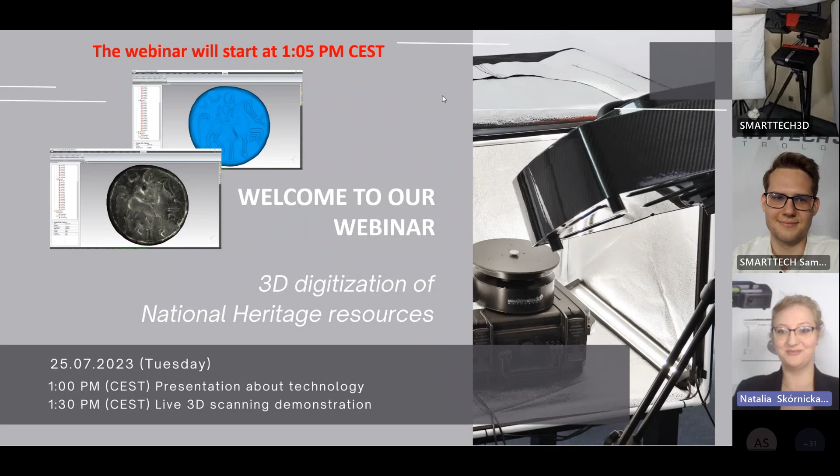To hear a little bit more about the 3D digitalization of national heritage resources. For everyone who doesn't know me yet, I'm Natalia Skórnicka. I'm an archaeologist and I work here at SMARTTECH as a 3D scanning specialist for science and research applications, actually. So very much in the subject. And here with me is our senior engineer, Paweł Aksamit. He will be helping me and presenting you the abilities of structured light technology today.

So let's jump straight into the presentation. I would like to start with a few words about the company that we are here today, but I will not be focusing only on the technology that is invented and developed in this company. I would like to give you a little bit more knowledge and information about archaeology and about different 3D scanning technologies that are possible to be implemented in the field.

This webinar has two main reasons why we decided to give such a short lecture. First of all, as SMARTTECH itself grows from the universities, it's very, very important for us to educate people and to give a heads-up on what's new in technology. We also have had a lot of questions from archaeologists for a few years, and the lead cause of that is that the European Union gave a recommendation in 2019 for museums in Europe to digitize at least 50% of the collection that they have. And since then, we observe growing interest from the archaeological field.

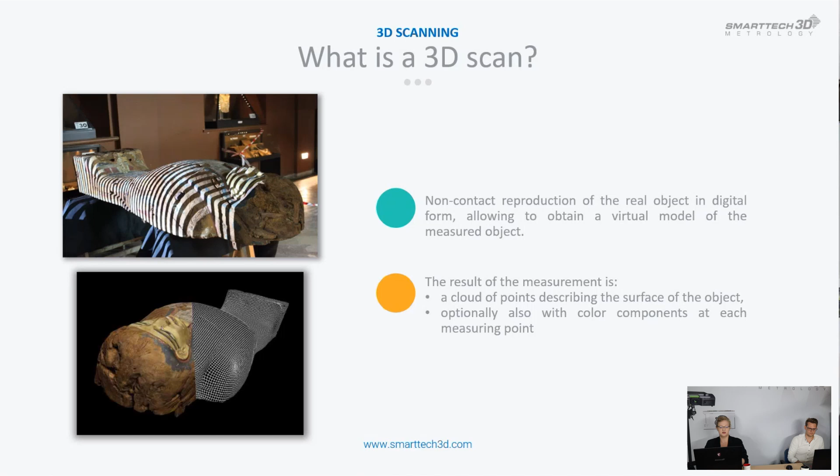But to start, what exactly is 3D scanning, for all of those who are from the field and are interested and just starting your adventure with 3D scanning? A 3D scan is basically making an image of a real object and taking it to its digital form, so you can use it on your computer, on your laptop, on your phones. We have different methods of 3D scanning, which I will be describing in a moment. But when we are talking about 3D scanning, we will be using a few terms: visualization, digitalization, and archiving. And I think it's very important to know the difference between them.

Starting from visualization, it's basically the most basic form of the 3D image that we can see on the screen. The density of points is a little bit lower, so the data file is lighter, and easier to implement in your presentation or on your website. You have a good image of what the object is, but you don't have any metrology data, so you cannot measure it. Those data are great to use on your website, but you cannot base any research on them.

The step up from visualization is digitalization. In addition to a very good representation of the surface of the object, we are adding metrical data. So we will know the size of an object, the distance between points that we want to measure. Those data can be used for research, are a very good representation of the object, and can be a part of professional archaeological documentation. And up from there, we have archival data. Those are data that have to be unprocessed.

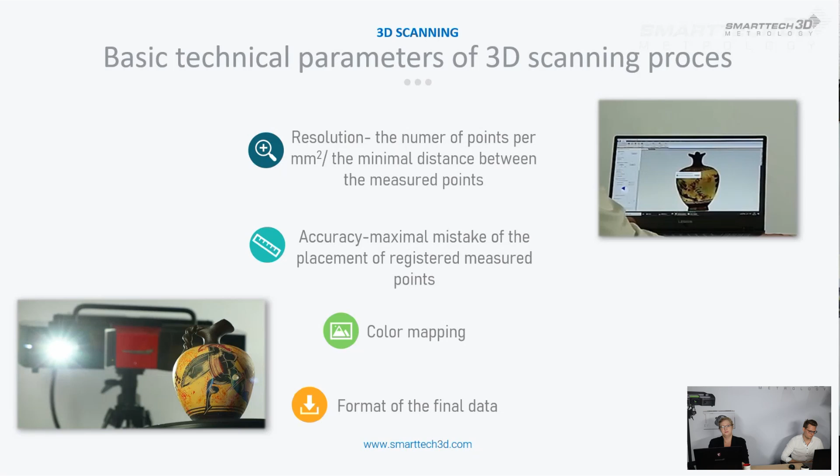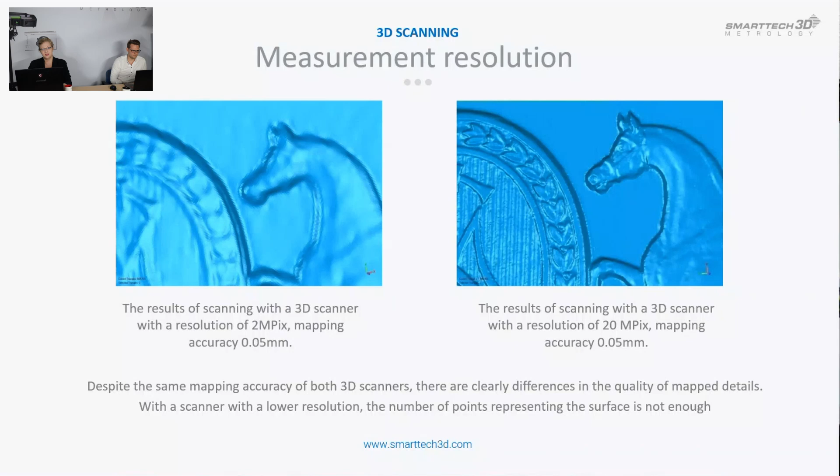And you can see that even if the accuracy is exactly the same, the visibility of details on the higher resolution picture is obviously much, much better. So those two parameters are very important to ask about when you are choosing your 3D scanner.

We are going to the main core of the presentation, so different 3D scanning methods. As I mentioned at the very beginning, we will not be focusing only on the structured light scanners. We want you and the archaeological community to know what you can choose from when you are searching for scanners for your projects.

We can have two main digitalization methods, passive and active. Passive methods are basically those that do not project any kind of light directly onto the object when capturing data. Within that passive group, we have two main recognizable methods, photogrammetry and structure from motion.

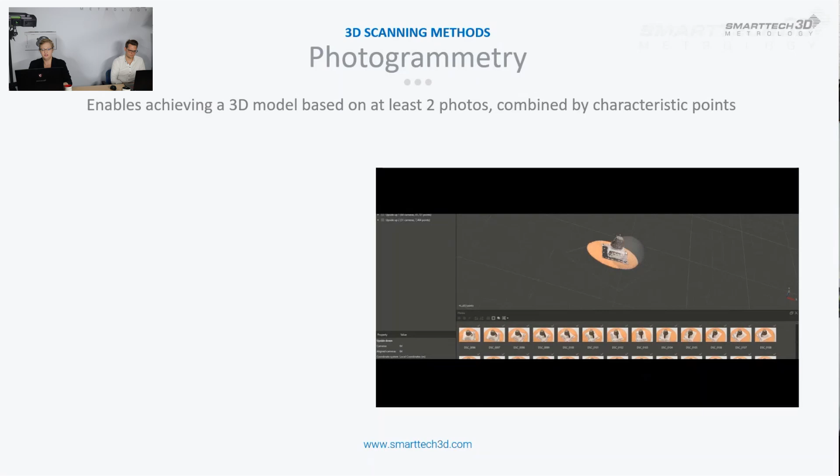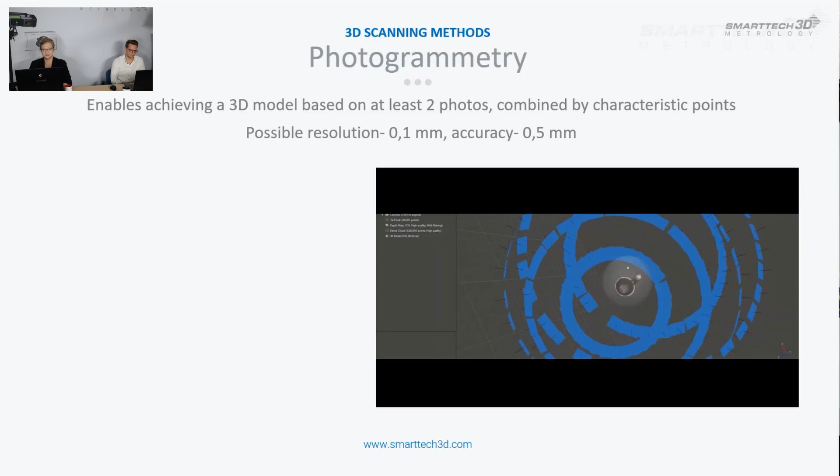Photogrammetry is, I would say, the most popular among archaeologists currently. This is the method that enables you to have a 3D model with the use of photos. You need at least two photos, they say, but actually you are using a lot of photos, as you can see currently on the video, and then you stitch them together using some known points that have their position in the metrological system, so in the XYZ coordinates.

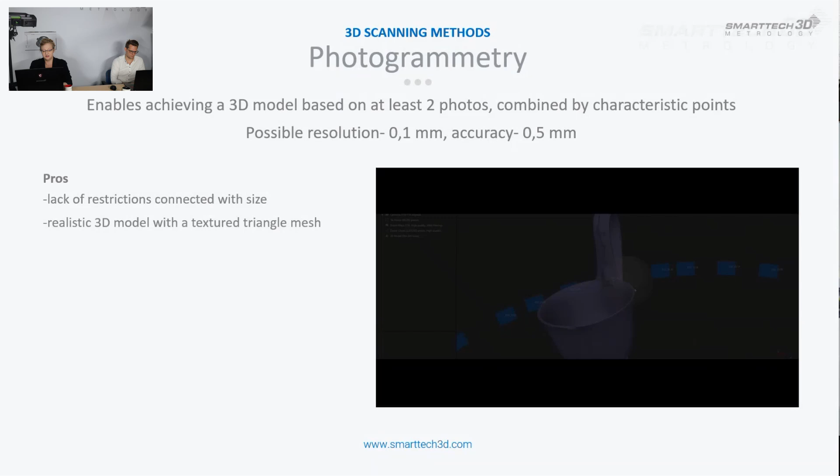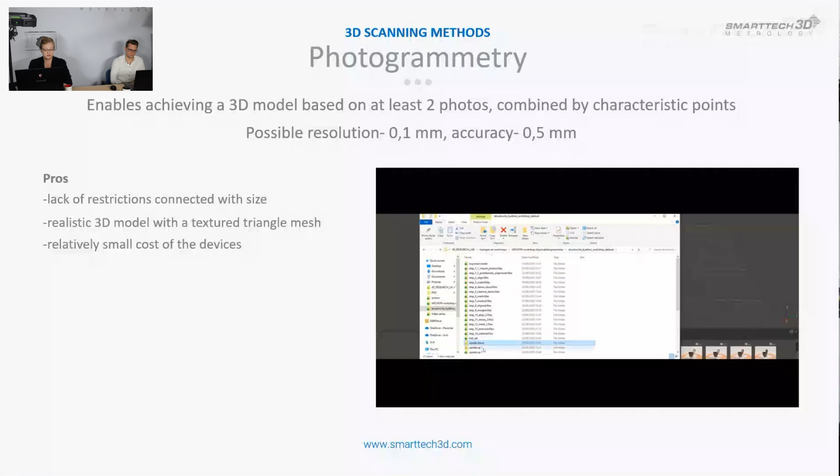That method allows you to have very good texture quality, and you are not restricted by the size of the object. So it doesn't matter how big or how small the object is, you can get a good looking texture, a good looking image. Also, the pro is that the cost of this method is relatively small. You basically need just a good quality camera and of course the software.

But going to the software, it's not that easy to operate. You need to have some extensive training. It's not so intuitive. It's easy to make mistakes with it. So you need some training to operate the software.

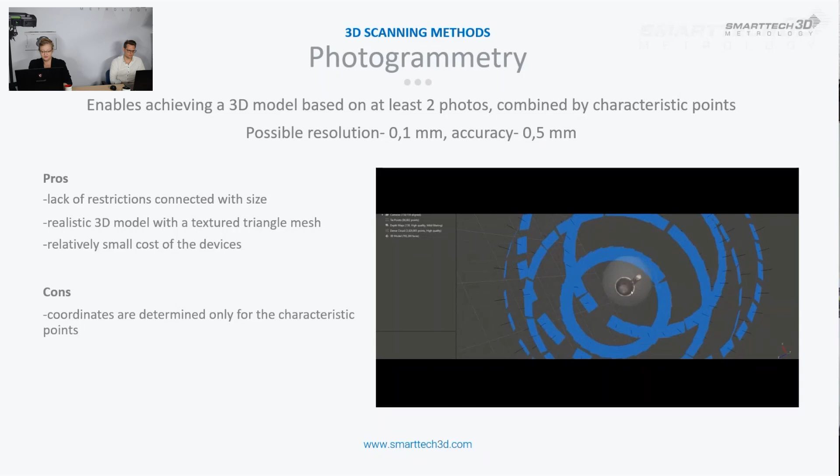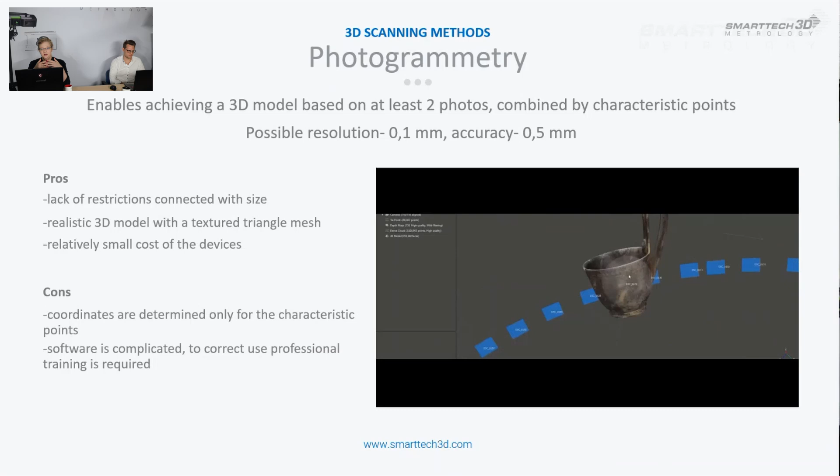Also, I mentioned that those pictures are stitched by known points, and only those points have determined coordinates, which means you can measure the object only by those points. The rest of the object is only more or less accurate according to those points. So we cannot say that photogrammetry is giving us a metrological 3D model.

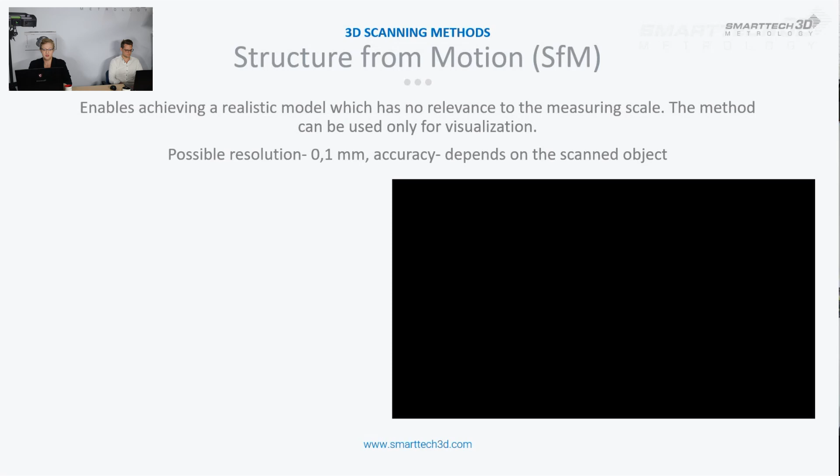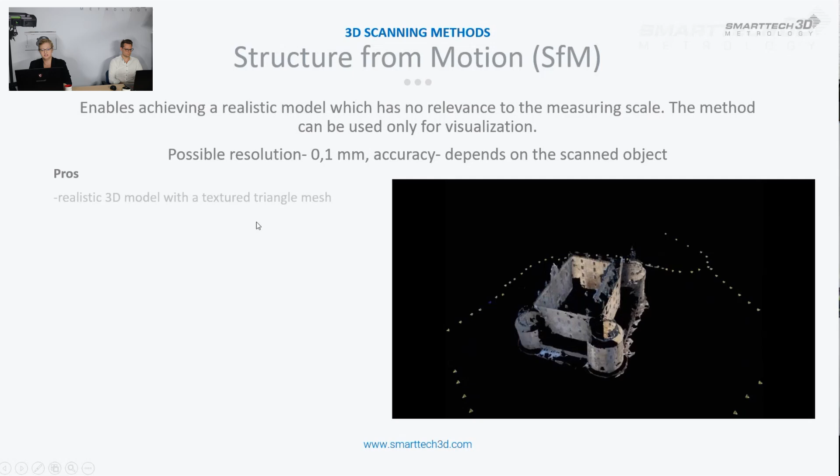The second method is structure from motion. This method is also based on photos, but here we do not have any relation with the coordinate system. So we have a good quality object again, good quality texture. We are not restricted by the size of the object, the same as with photogrammetry. And again, the cost of the device is relatively small in comparison to active methods.

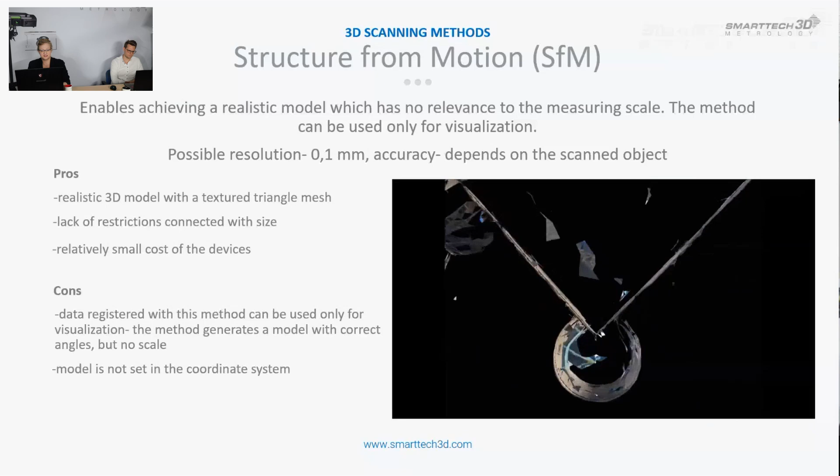But we do not have any points that are placed in the coordinate system, so we cannot know at all the real size of an object. And also, the software that we are using for this method cannot verify itself if the model that was built is correct, so we have to do it manually.

So going back to digitalization methods, we also have active methods. Those methods are based on projecting light or a beam on the object to register the geometry. Here, the most popular in my opinion are laser triangulation, time of flight, and structured light technology.

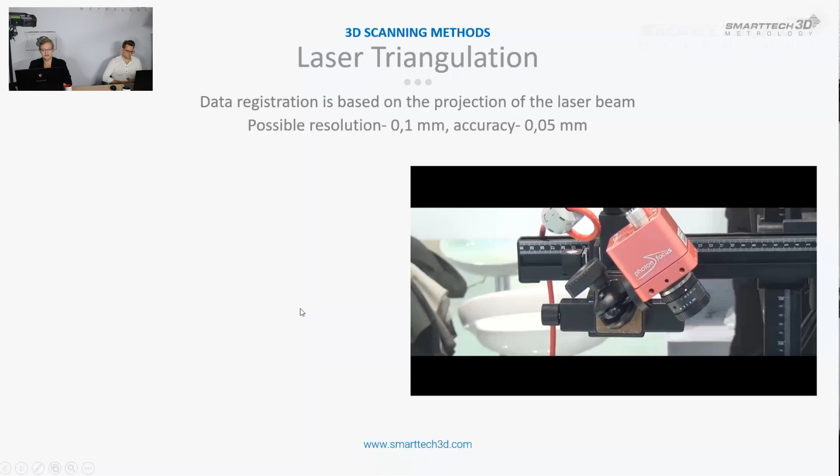So, the laser triangulation method uses a laser beam projected on the object, and it registers that laser to capture geometry. Here we have even geometry sampling on the whole object, so where the beam is, we have even geometry, and we can use this method for measuring directly in sunlight. So we are not restricted by any kind of lighting with this method.

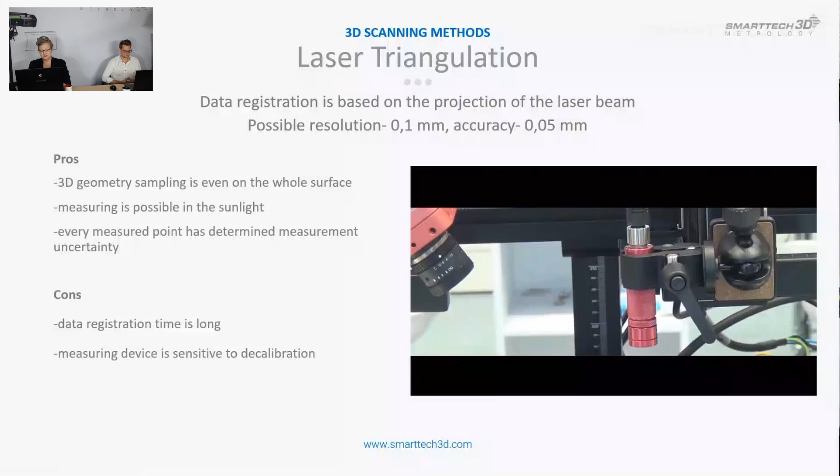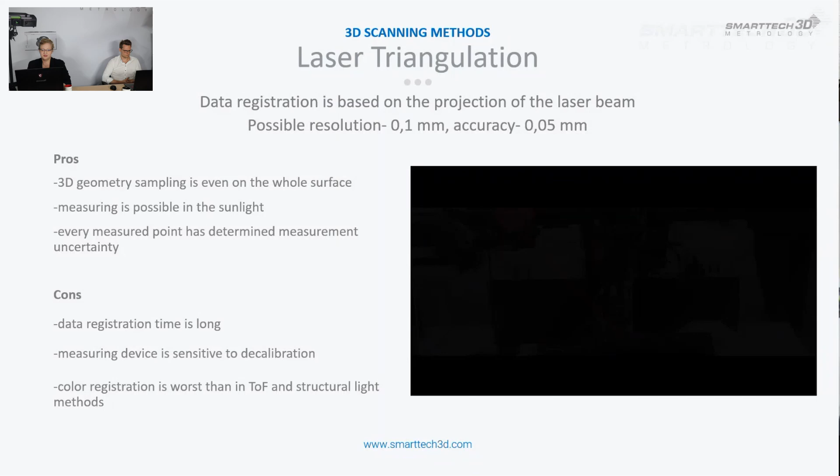But also, as you can see on that very short video, the device itself has a pretty complicated structure, so it is easy to be damaged or easy to be decalibrated when measuring. Also, the time of registering data is pretty long, and out of all three active methods that I will be describing, this one, if capturing color, because it's also not a standard option, has the worst capabilities of capturing quality color of all three.

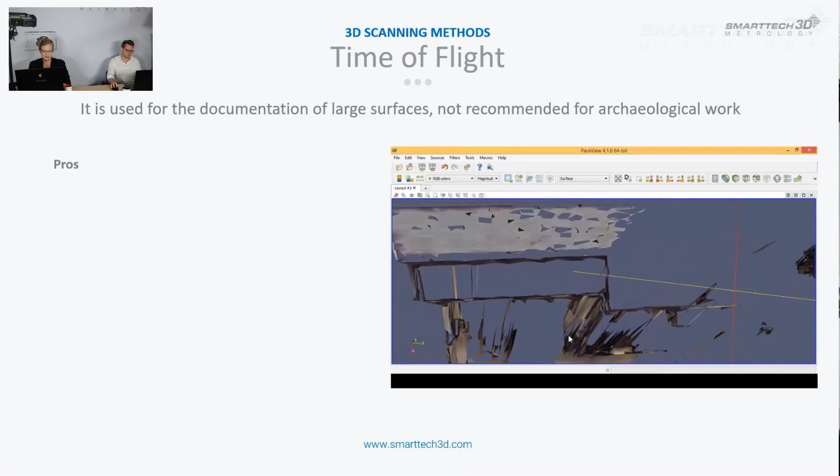Then we have a time of flight method. This is also using a laser beam, but it registers the time of flight of that beam. It's also pretty popular in archaeology currently, and it's basically used for 3D scanning of bigger objects like buildings. Here also, as in the previous method, we have even 3D geometry sampling throughout the whole geometry. And we know the accuracy of the model right from the start. And we can measure in sunlight again. So this is pretty standard for measuring with a laser beam.

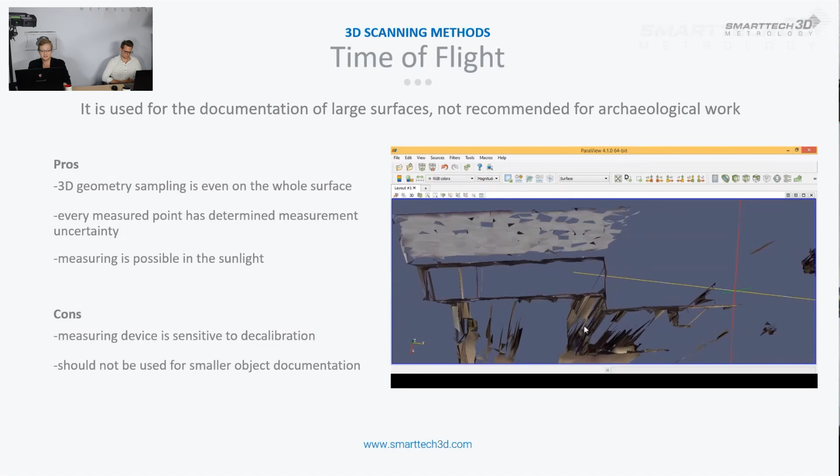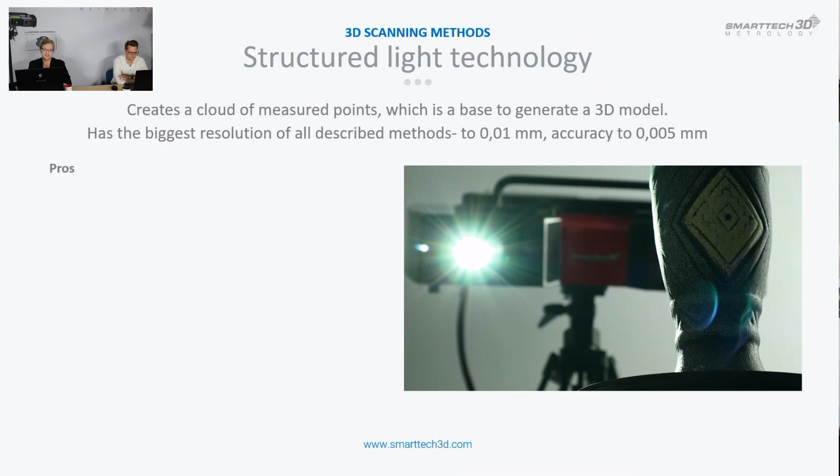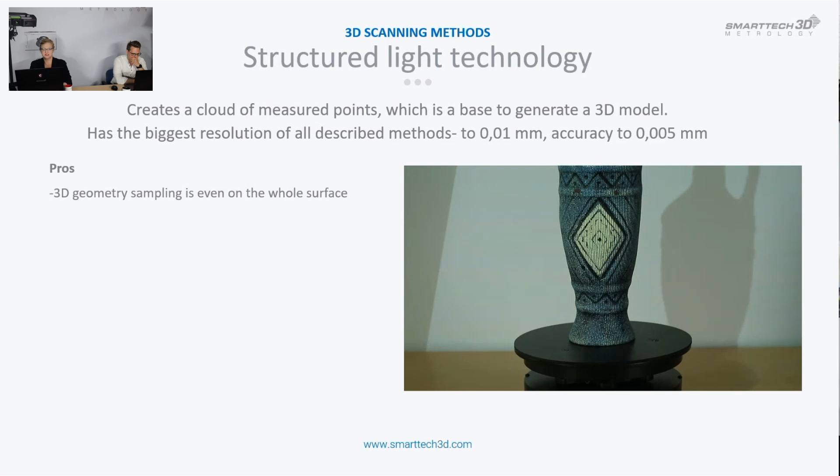And we went for structured light technology. This is the newest of all three methods, and also the most advanced. This method is using structured light to capture data, so not laser this time. That makes it safe for painted surfaces and for the eyesight. Also, devices don't radiate in any way, so the operator can work with it for a long period of time. We have again even geometry sampling through the whole object, so we know the position of each point.

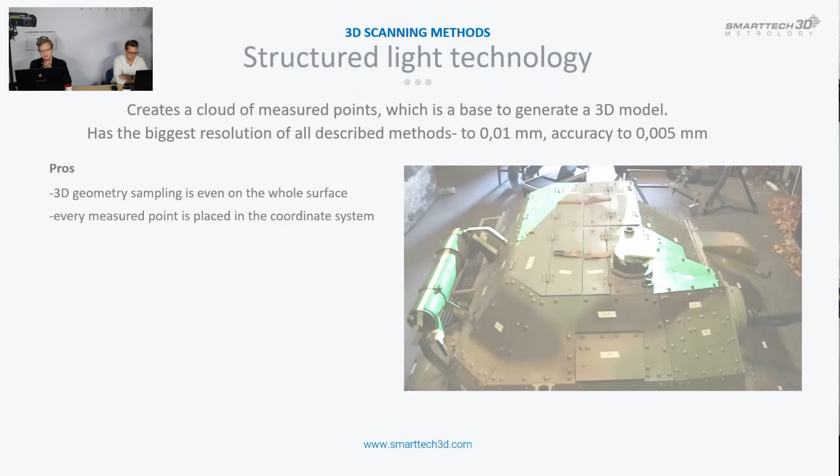Also important is that when we are using structured light, the result of the scanning is a point cloud, which you will see in the technical presentation. And each of those millions of points has a known position in the coordinate system. So the 3D model is completely measurable, and we also know the accuracy of the placement of each point. So a perfect source for research.

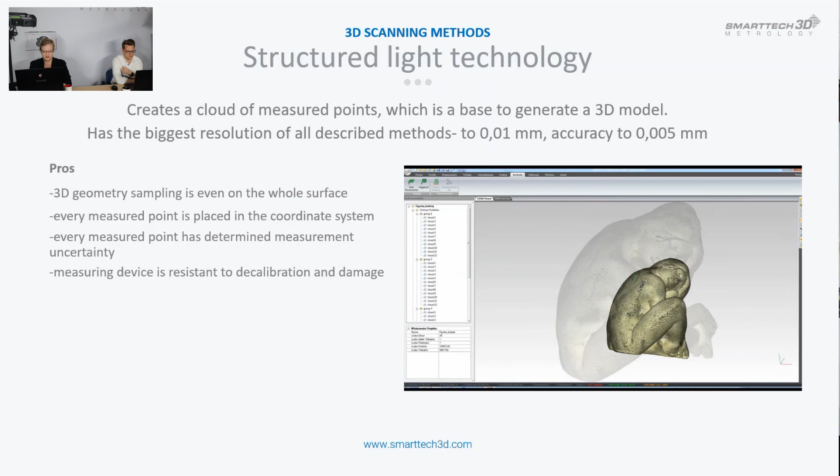Here, what we are working on, especially at SMARTTECH, is that we want the scanners to be made with the newest possible protection technologies, also to make them resistant to decalibration and resistant to damage. So you can, even if you want, use them while traveling. You can use them on an excavation site or in a laboratory. They have dust-proof filters, so they are pretty damage-resistant devices.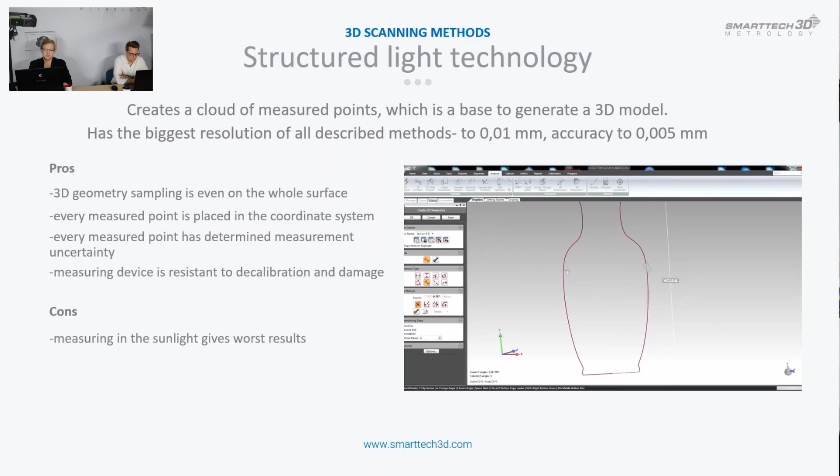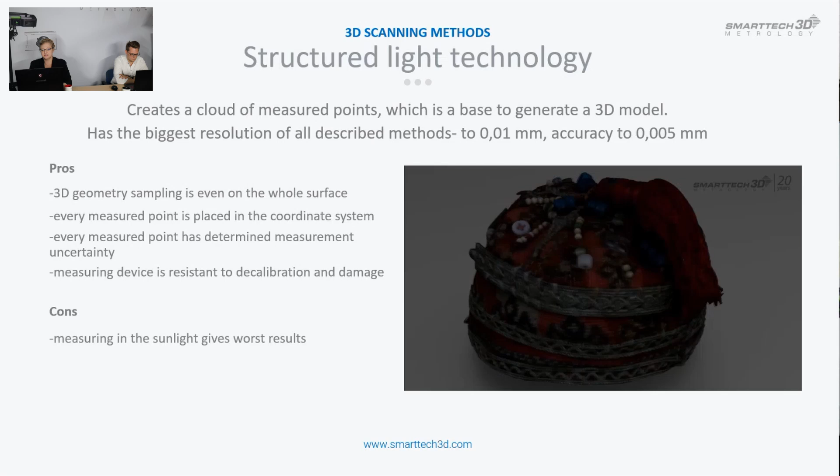But here we have a limitation of scanning in direct sunlight. If we want to scan outside, it is recommended to use some kind of shading tent, or to scan inside. We can use inside lighting easily, but direct sunlight will disturb the results of measuring. Also, structured light technology is dedicated to scanning smaller objects. Each scanner has something we call field of view, the area that the scanner can see with a single shot, let's say. And the best is if the object fits in the field of view or is a few times bigger than the field of view. But if it's much bigger, then scanning such an object can be time consuming.

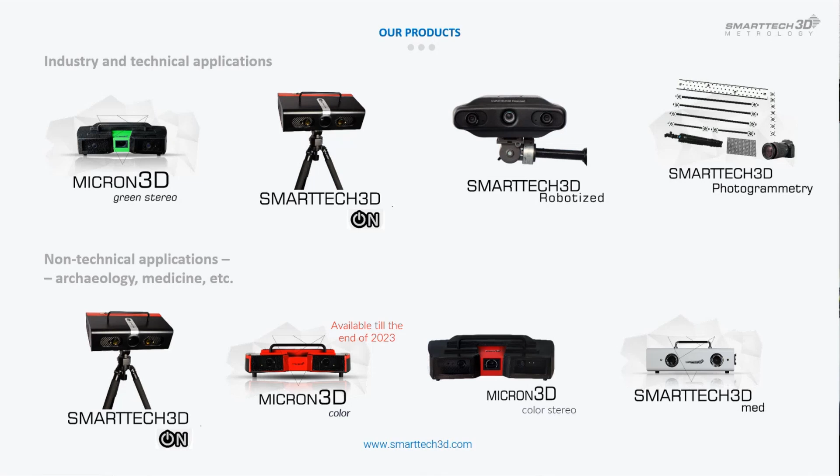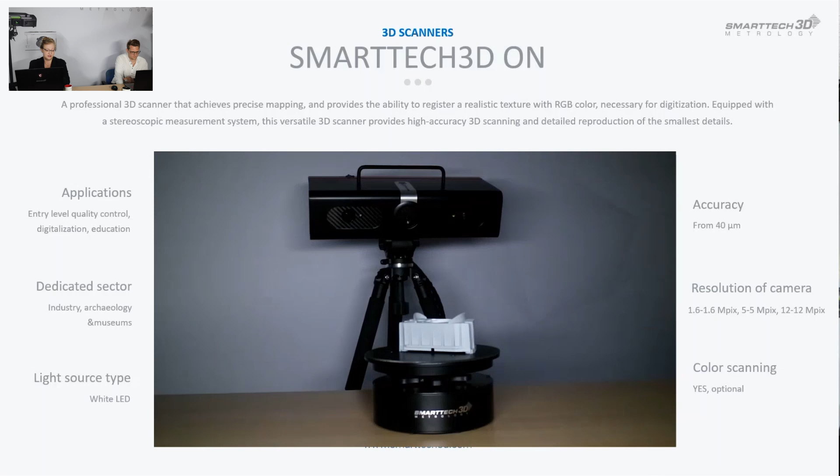But starting from the beginning, something that is available since the beginning of this year: SMARTTECH3D ON. A smaller scanner that is easy to take as hand luggage when you travel by plane or to move around. Smaller size casing, but it is a stereo system scanner that has the ability to capture color. The use of stereo technology, so the use of two cameras in the scanner, enables it to capture very crisp, clean geometry, clean edges, crisp edges. So all the shapes are very, very well registered.

And this scanner is very multi-use, I would say. It is a point of interest for entry-level quality control and reverse engineering, which can also be applied at that level of detail for archaeology when you want, for example, to compare two objects to each other, or to do some modifications for 3D printing, but the scanner is also a point of interest for education, for digitalization, entry-level digitalization, etc.

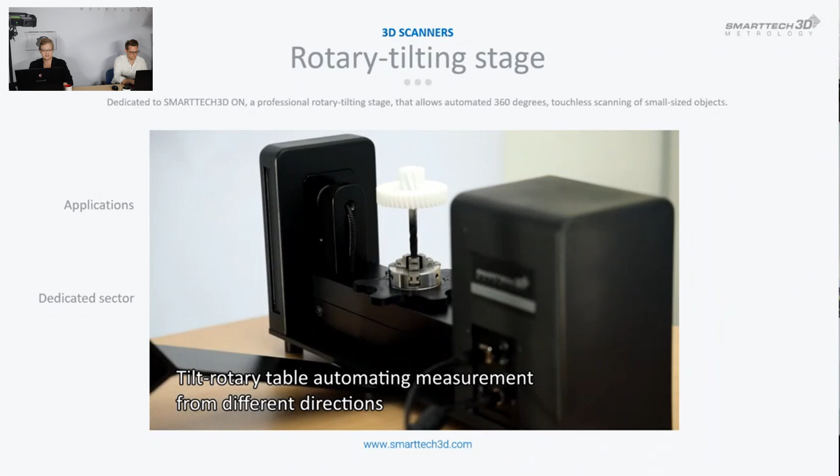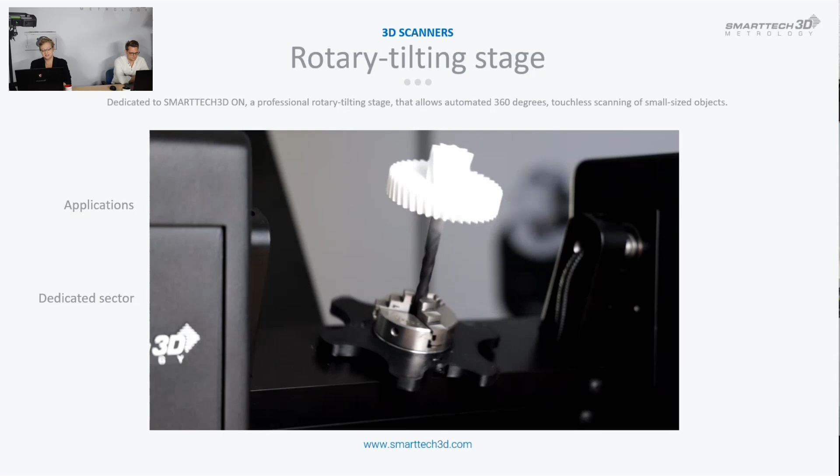A very interesting accessory for that scanner is a rotary tilting stage. This is something maybe more interesting for industry, but I wanted to show it to you because for some applications it can also be interesting for archaeology. For example, for scanning coins when we apply some magnetic mounting. The rotary tilting stage is an automated station that allows you to scan the object 360, because it rotates like our regular rotary stages, and it also tilts to capture data all around.

And a sneak peek for you, Micron 3D Color Stereo. You can see both scanners on the second screen from the second camera. So this is the bigger one. That scanner is not available yet. It will be launched at the end of this year, the last quarter of this year, so very, very soon. But it will be very breaking news for the community, in my opinion. This is an upgraded Micron 3D Color. If you are familiar with SMARTTECH, you probably know that model, which was very, very popular all around the world

with museums and digitalization. But because digitalization is growing among archaeologists, and customers from that industry are getting more and more demanding, and projects are more demanding, we decided to upgrade it to a stereo system too, and the resolution here goes up to 20 megapixels for each camera, which makes the scanner the highest resolution available on the market. It will also come with an upgraded texturing module in our software, which will also be presented. I've seen the results. They are really breathtaking, so I cannot wait until you see them too in a few minutes.

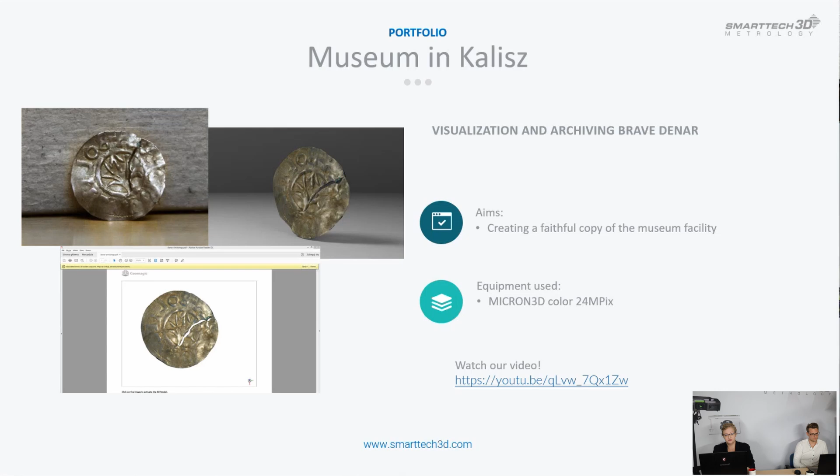In the museum in Kalisz, also in Poland, we've done a digitalization of a coin, one of the first coins from Polish history, and it's very rare. Besides digitizing it, the museum modified the scan and created a stamp to make exact copies of that artifact, which is perfect for creating copies for other exhibitions and for educational purposes. You can send it to a university for students to have it in their hands and analyze it. It's also a pretty easy and cheap way to make some very good looking objects for museum shops, for example.

Another project of modifying a 3D model we've done for Malbork Castle Museum, also in Poland. We scanned a cannon to 3D print a copy to send it to the museum of origin of this cannon, but there was also a project to digitally modify the model to bring back the functionality of the cannon. A very interesting project.

One of the pride points in Poland, we have a biobank laboratory that created an online platform with a digitized collection. For now the project is pretty new, just a part of that collection of human remains from a particular part of Poland, and the data has metrical information too, so you can use it for research. A few papers are already made based on it, available on the website, so we can know a little bit more about the origin of the people, about diet, about migrations, a lot of very interesting information.

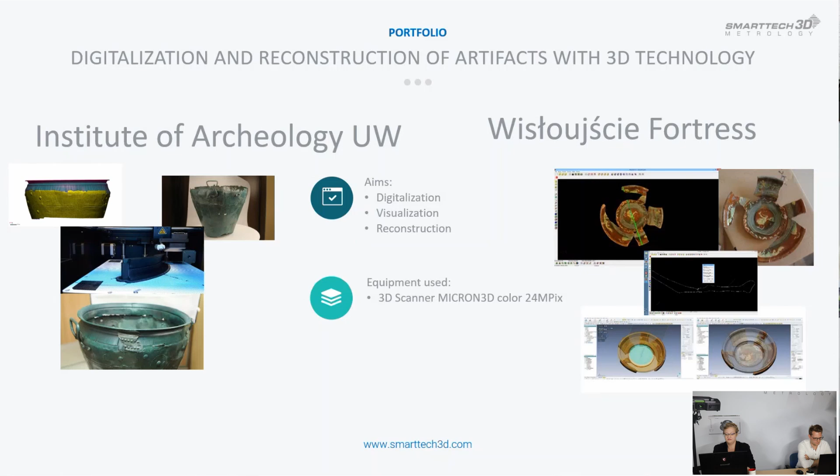We've also done a reconstruction of a decorated pottery plate that, as you can see in the pictures, is damaged. Normally archaeologists need to do the reconstruction manually, which takes time and expertise. Here you can generate it automatically, and of course you have very detailed documentation.

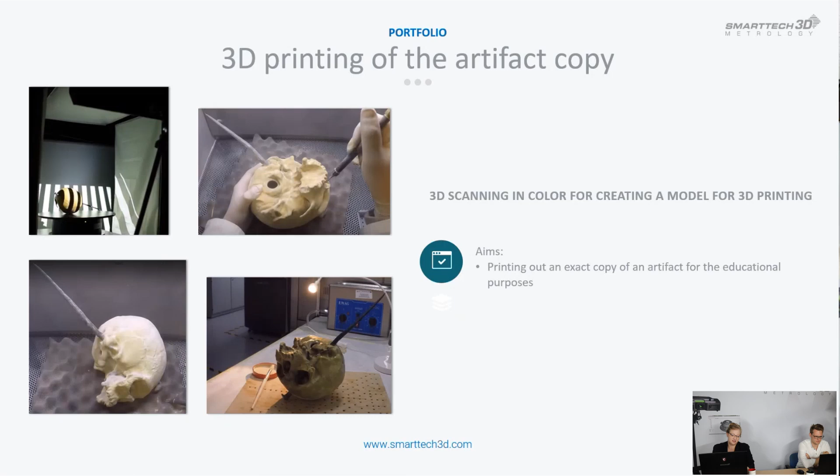The skull was the remain called the vampire from Piotrków, named so because of the nail pierced through the skull. It was placed on the rotary stage very carefully because it was fragile, then scanned and 3D printed. The results you can see in the bottom right picture - this is not the original object, but the 3D printout of the skull that could be driven around for presentations safely.

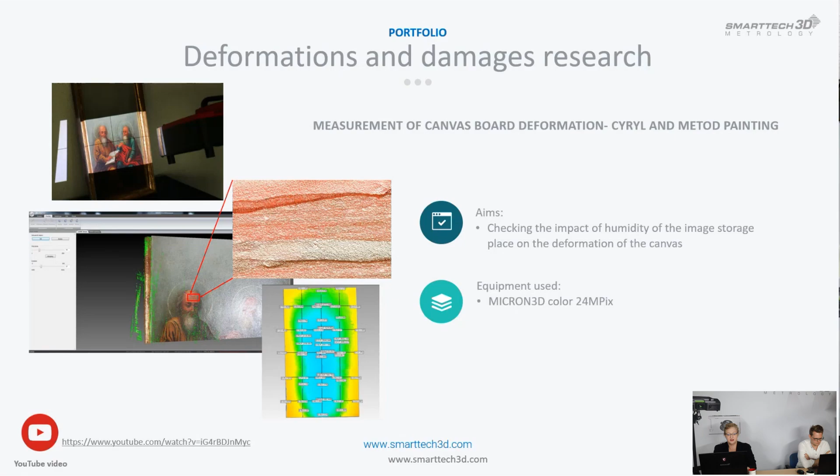Scanners were also used for scanning paintings, here to check the differences or damage that humidity caused to the structure of the painting. Both scans could be compared to each other, and in the bottom right picture you can see the results of the comparison, where the deformation appeared.

So this was a very condensed portion of information. I know it's a lot, but I think it's important to know more or less how it works and what tools you have available as archaeologists or museologists to work with those precious artifacts.

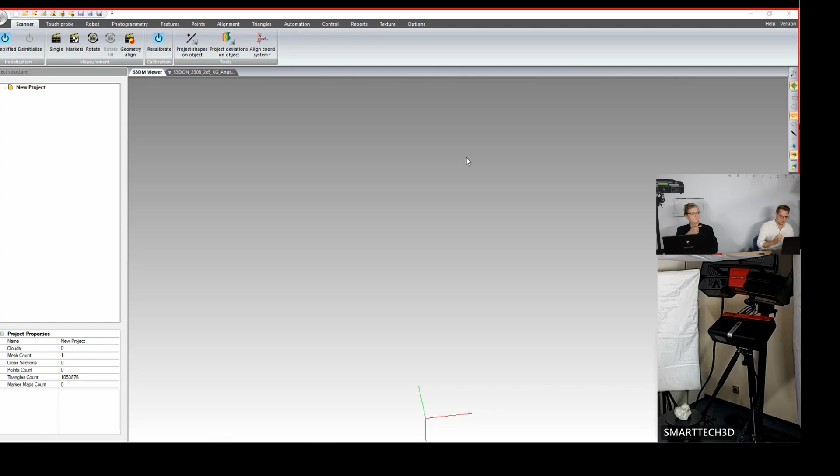Above that, we've got a more advanced device, the Micron 3D Color stereo device. There we've got 24 megapixels of resolution per camera, both of them. It's a little bit heavy duty, but thanks to it we can achieve and get much more detail onto the surface of the object. Of course, as with the SMARTTECH3D, we need to use white color.

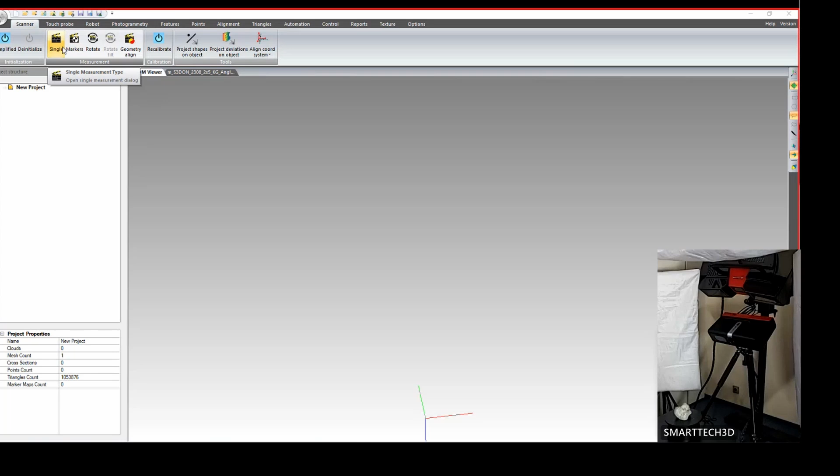Thanks to it, we also use the rotary stage. During the whole process, I would like to start with the main topic, the scanning of the whole object. So let's start the whole scanning process.

It is really quick. If you pay attention, it will be easier to understand, because structural light scanners need to make the scan using light. We project horizontal and vertical stripes exactly onto the surface of the objects, and that allows us to get information back to the detectors. In the end, we are grabbing that information.

If you would like better quality of the whole scan and better implementation of the color, we also use a shadeless system. This is important because we want to remove all the shadows from the surface of the objects, so that we gather much better and clearer information.

If we want to make the scan with rotation, to better automate the whole scanning process, we can use the rotary stage. Here is the smaller device that we produce and develop, but it's not the only device we can do.

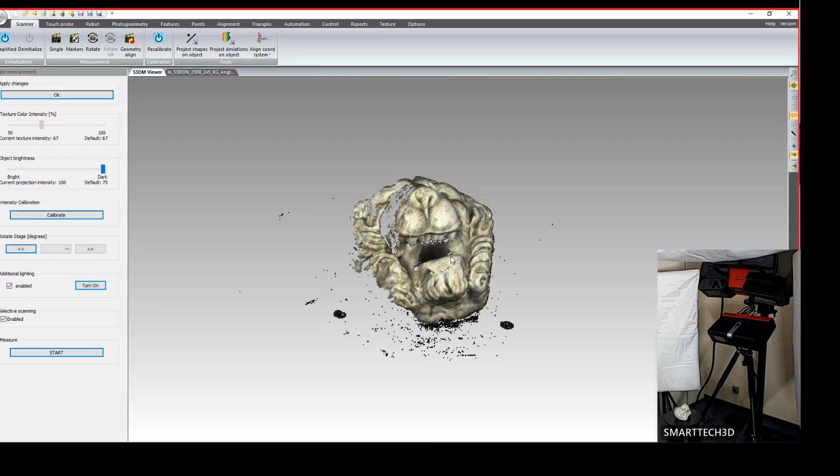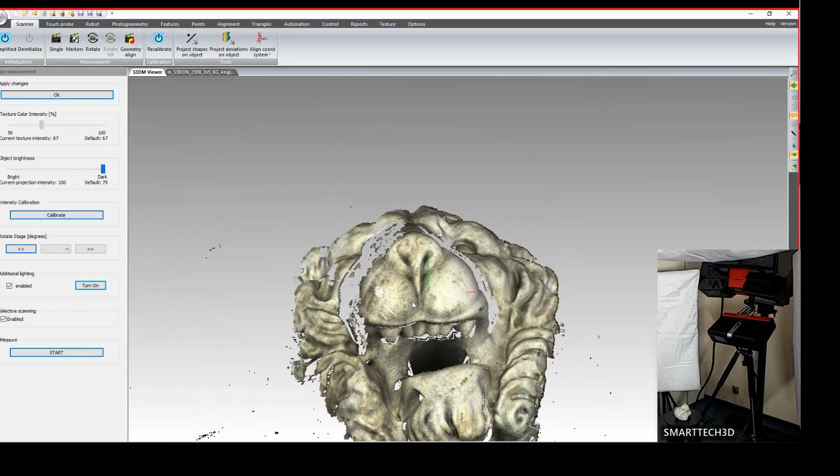If you want to make the whole scan, the result we achieve, as Natalia said at the beginning of the presentation, is a cloud of points. But the density of the points is so high that we can see all those details exactly on the object. Even though it's not yet a surface, that's not a problem for us, because we are going to transform it into a triangle mesh surface in a minute. Going back to the more technical subject, all of the points we achieve have their own information about color.

The RGB information of the color is really important, because we are making the whole process a bit more automatized, and we're grabbing the texture during the scanning process. So we don't need to make additional photos afterwards.

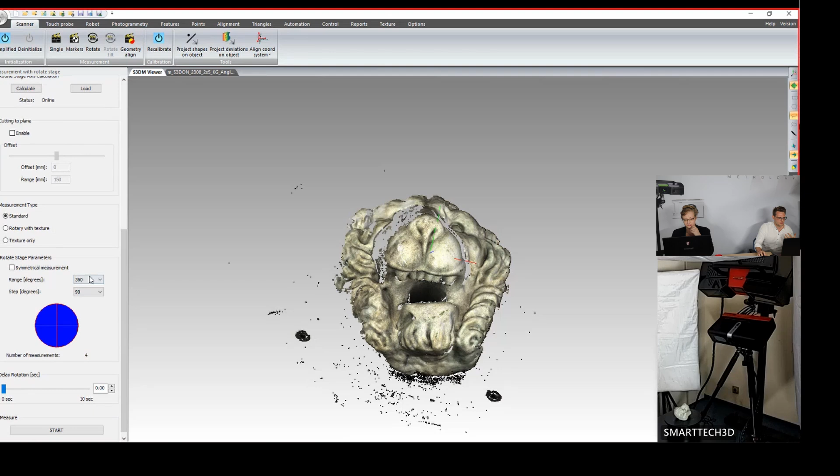Let's go to the rotate stage. As an operator, I can change the range and also the step of the rotations. For example, here we would like to make a scan at different angles.

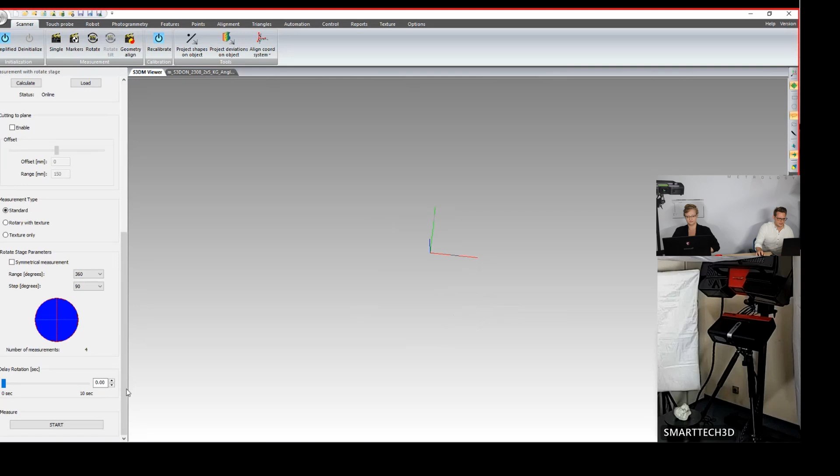Let's make the scan I made before invisible, so you can see the raw data from the rotary stage. During this process, we can pay attention to the whole scanning process. Right now we are making the projection of the horizontal and vertical stripes.

Detectors grab the information from the curvature of the object, and the laptop might just be a single gaming laptop with a slightly better processor and higher amount of RAM memory. So we don't need really high-end, expensive processors in our devices, because our software is really automatized, so we can work with a big amount of data using standard devices.

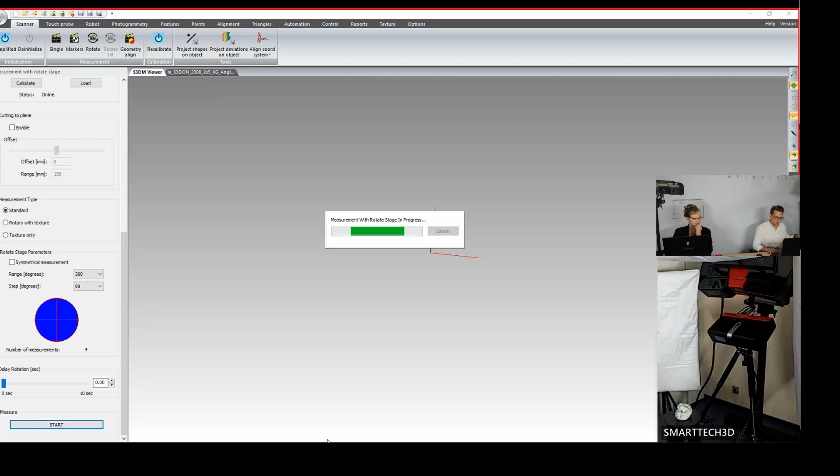Going back to the scanning process, after each projection of the horizontal and vertical stripes, we also need to use the shadeless system. The whole lighting will appear for 1 second, then we grab the information about the texture. The rotary stage moves to the next position, and the whole process repeats automatically.

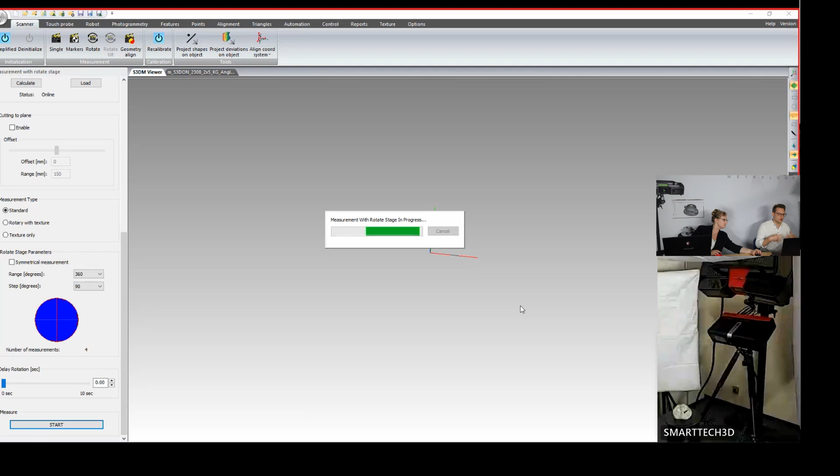That's how it's going to work in this moment. We are going to grab 4 of those measurements, and in a second we'll see the whole result. Our software shows results from all sides, and those 4 positions allow us to capture much more information.

As you can see on the screen, we've got some noise, but it's not a problem for us, because all we have to do is a really quick and simple operation, and I think everyone, after a quick training, will be able to do it on his own.

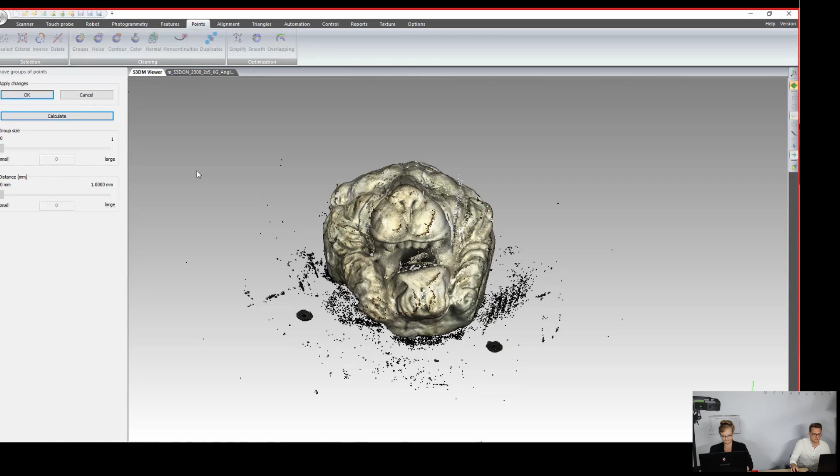We need to go to the points and just make the post-processing. The algorithm inside our software allows us to automatically calculate all the points that are not strictly connected with the main geometry of the object.

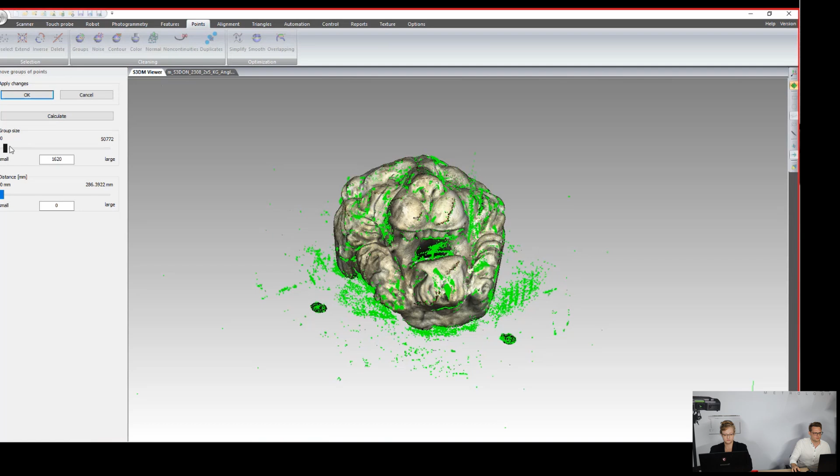As an operator, I can choose if the points selected in green are elements we would like to remove. We can change this value to a smaller one, and delete those points that were noise in our case. Let's remove those points with the next method, the manual method. And voila, we've got the whole object prepared in much better condition.

We can do one more thing. It's not necessary, but it will give us a little bit better result. We are grabbing all the clouds and sticking them together using the best fit method algorithm inside our software.

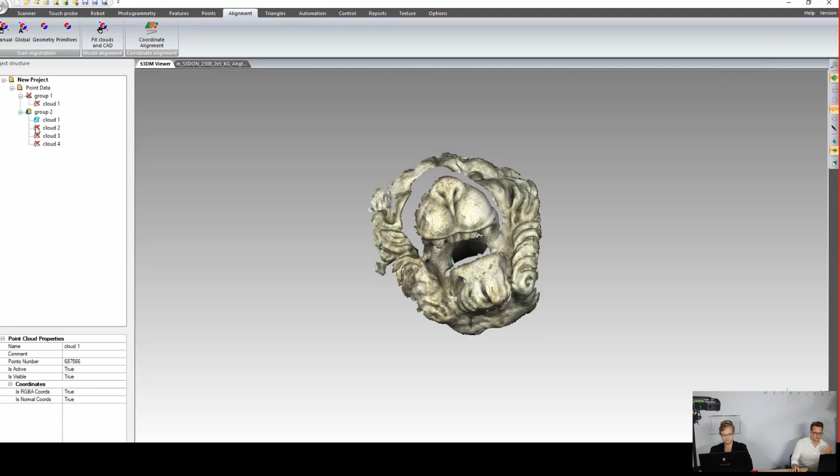What we will see here, from my side, was the first scan we achieved from one side. Then the rotary stage moved to the next position and the scanner grabbed another piece of information. We are capturing all of these objects from many different angles, and in the end we get this information after about 1 minute of post-processing.

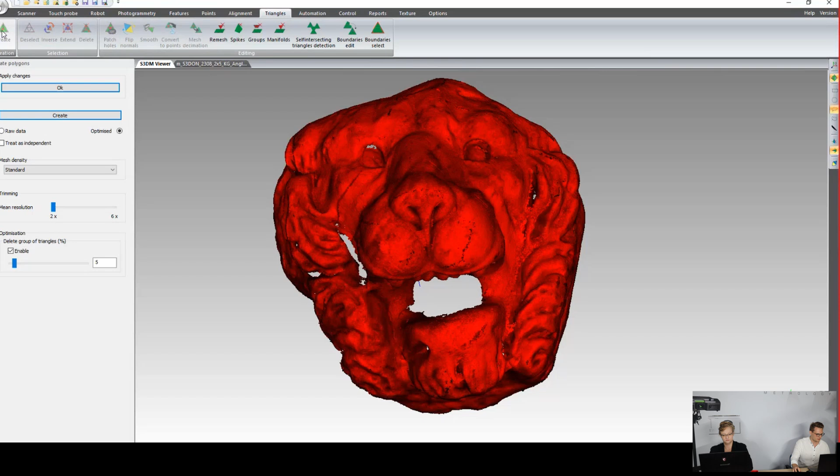Another quite important thing is that, if you would like, we can transform this data into a triangle mesh. Let's do it - we can select Triangles, then create it, and that's it. We need to wait just a little bit until we have the full triangle mesh information.

During this process it might be important to note that we are grabbing a lot of information at one time. On the bottom part of the screen, you can see that right now this project, shown on the display, contains about 3 million points.

So for example, if you would like to use the higher resolution of the scanner, for example, the Micron 3D color stereo, then with those 4 scans we'll have a much bigger point cloud than we can achieve here. And I prepared another thing for you, because what you can see is the result from the 5 megapixel resolution of the SMARTTECH3D, and still we can see all of those defects, parts and damages on the surface of this sculpture.

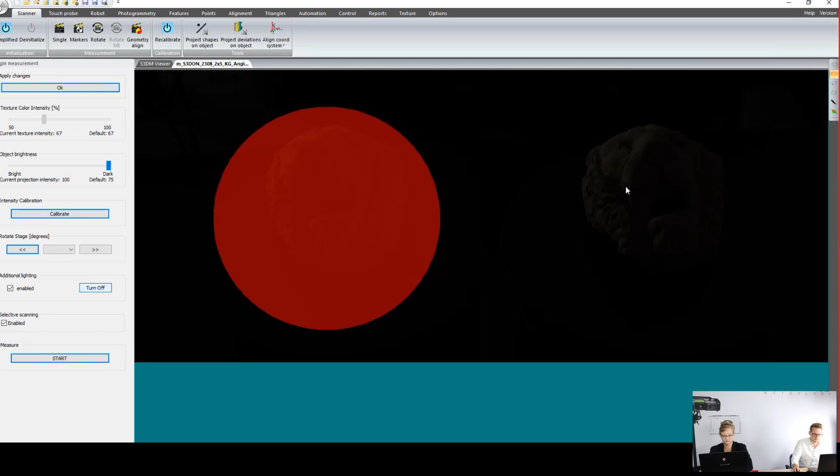And if you would like to see it, it's not a problem, because we can also turn on the live view in our software and turn on the additional lighting. So we'll see clearly how the software and the device see the whole object. Here, it's the selective scanning method that I used during the scanning process to allow us to focus only on the surface that we are interested in. So if you would like to speed up the scanning process, you can just select the particular element of the sculpture that you are interested in, and it will make the scanning process faster.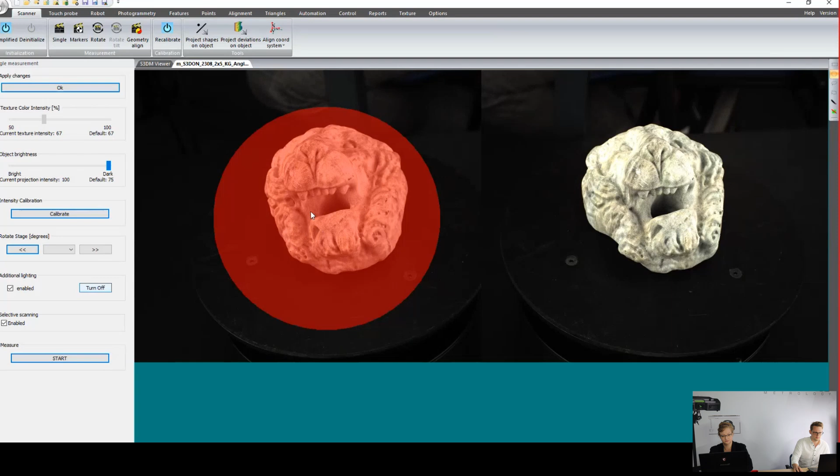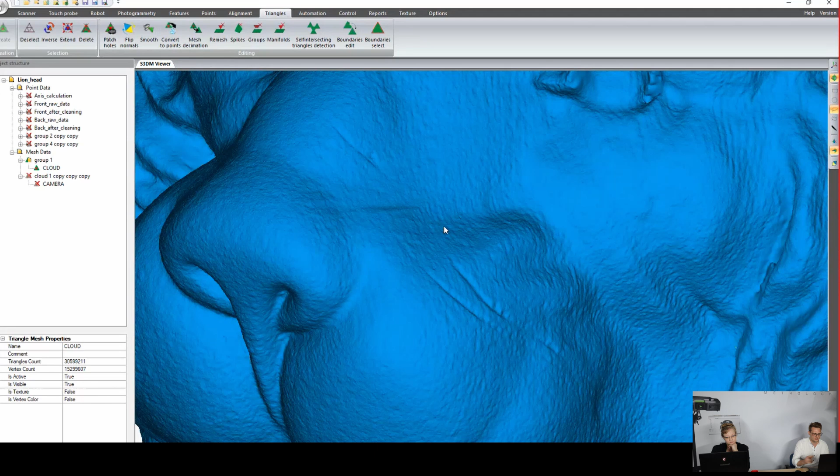So let's come back to our scanned object. What we can see here is the triangle mesh, like I said before. And if you would like to compare it with the 12 megapixel resolution, I prepared this project a little bit earlier. So let's come back to the next image. As you can see, this is the information and the surface of the object with 12 megapixel resolution. You may ask why we've got so much roughness on the surface. It's because originally this object was made with a rough and sandy surface. That's why we've got much more detail and information on the surface.

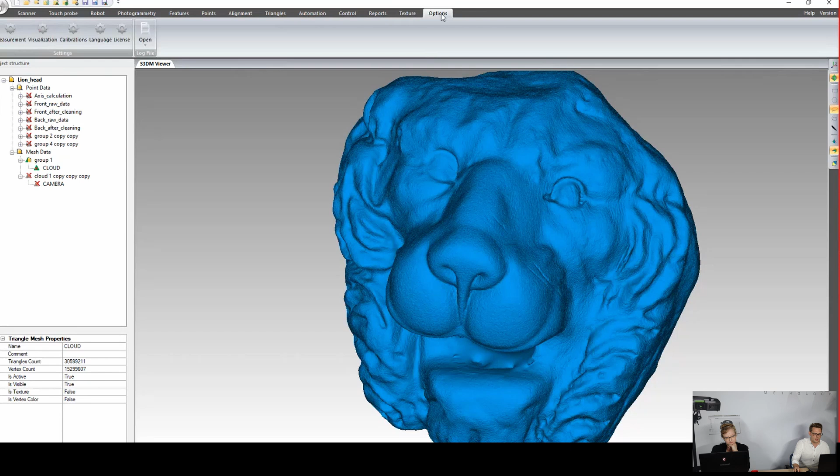But right now we are still talking about the geometry of the objects. What if we would like to texture the object? All we have to do is go to the particular toolbar and have the software create the texture that will be gathered from the points that we achieved before. I've got it already done, so we need to swap to the next position, and this is the result that we achieved with the geometry and also the texture. The whole object, the look from all of the angles. That's how it looks.

And this is the standard method, because we can use 2 separate methods for texturing the whole object. So as you can see, the texture was added to each particular triangle that we've got here. But it's not the end. With our devices, we can focus on digitalization and visualization like you've got here, but we can also prepare documentation that might be really important in our case.

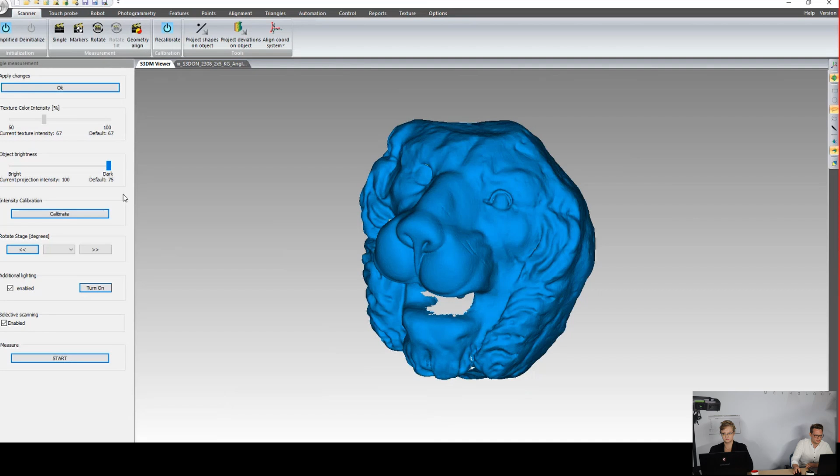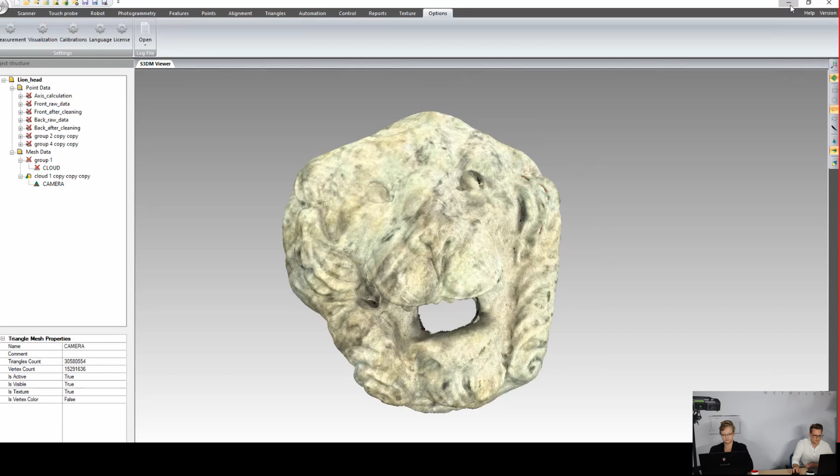So for example, if we have the point cloud here, we can select all of those points and export the texture. Let's do it, in my case, on the desktop. Choose the folder. In a minute we'll get the information that all textures exported successfully, and we can come back to my desktop. The whole object will appear here in this folder, and when we get into it, we'll have saved all of those photos that were used during texturing and capturing the information about the object. So if you would like to make a 3D model of the exhibit, the sculpture, the monument, you can also prepare the whole documentation.

And because we are using the stereo system, we are gathering twice as many photos as we would be able to achieve with a standard single scanner. And in our case, when we are talking about digitalization and good implementation of color in virtual reality, a bigger amount of information is really crucial, and we can prepare better texture thanks to those scans. And speaking of this method, lately we were working as a measurement team from our office on the digitalization of a museum in Poland. There were a lot of sculptures with really difficult geometry and surfaces, because they were covered with paint and the surface was also glazed.

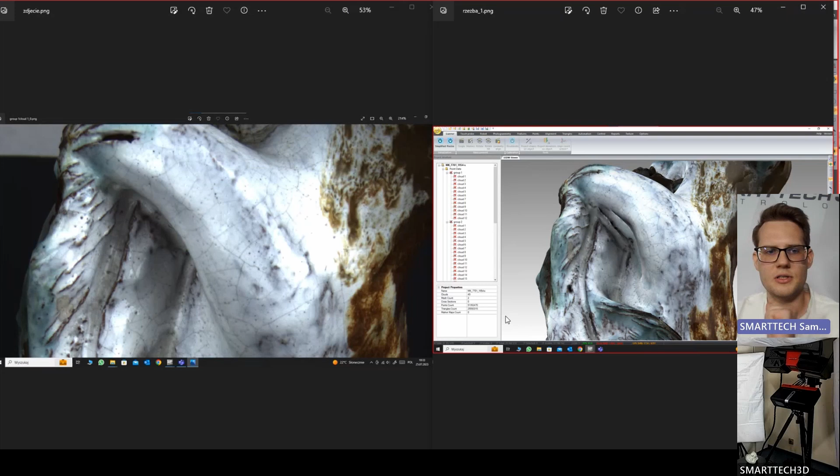So it might be a little bit difficult, but still, I hope that you will see the result out here. Unfortunately, we are still working on the digitalizations, so I cannot show you a bigger amount of the information. But as you can see on the left side, we've got the information from the photo, just the single photo of the texture. And on the right side, you can see the triangle mesh prepared with the cloud of points, of course, and then added the texture to it.

So even with our new method of texturing, we can see that all of those scratches will also be visible even if the whole surface is glazed. So we are trying to improve our software all the time. Thanks to that, we've got our own software engineers in the company. We can implement a lot of extra applications and features and functions.

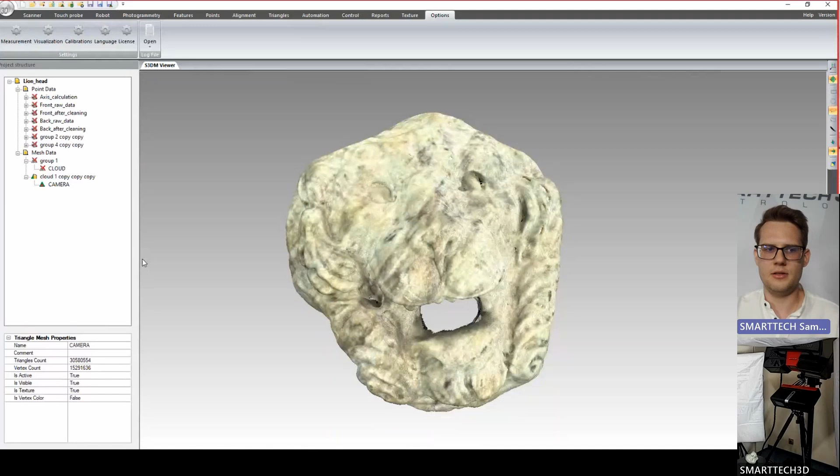So for example, if in the future you would like to prepare some special project, we are open to communicate with you, and we are open to hear all of the things that you would like to work on with us. Those are some of the most important things when we are talking about digitalization, archiving, and also documentation. But let's stay for a little bit with our objects, for example, the triangle mesh, because we can make some measurements, even if we are talking just about digitalization.

So to do it, all we have to do is to go to the control where we've got all sections and all of the applications that we can use for the measuring process. So for example, if you'd like to measure the distance between 2 points, it's not a problem in our case. You just need to select both of them, and in a minute we should have the information out here with the distance method, and over here we've got it.

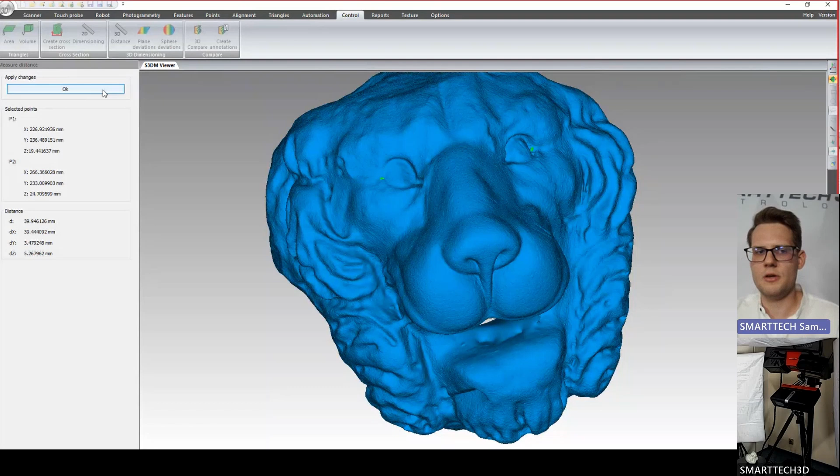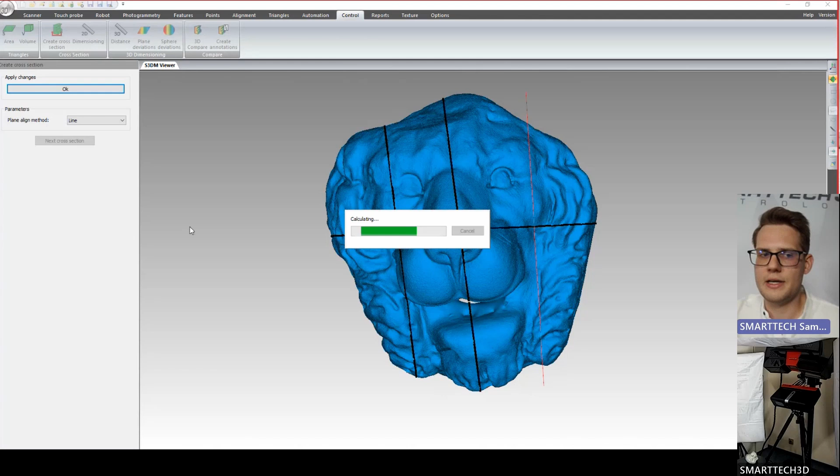This is the value of it, but it's not a problem if you would like to also make the cross section. So all you have to do is to select our cloud of points and prepare the cross section that might be important in our case. We can do multiple of them. So for example, that might be the first, the second, and let's add another 2 cross sections. We can also export those data into different software.

So we wanted to be fully open for our customers, and if they want to just use our scanner to capture the information, it is possible, and then they can use it with different software. But going back to the cross sections, with all of it, we've got a lot of information that might be really useful for medical purposes, or like digitalization of some exhibits. This is quite important. And we can use different methods for measuring.

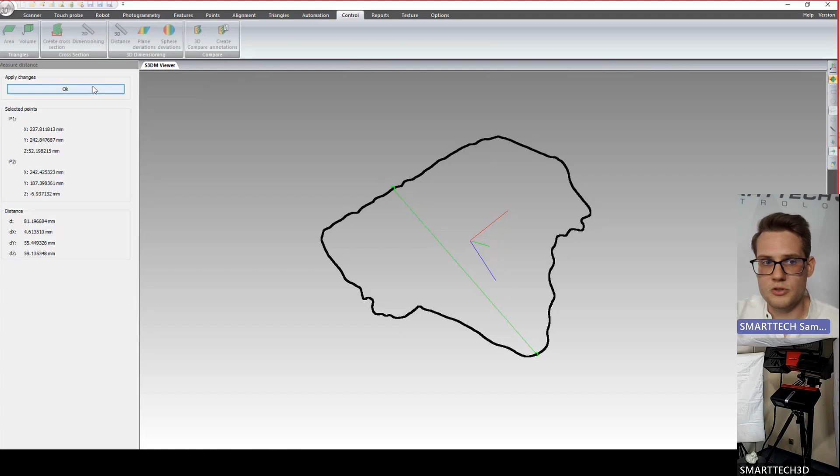For example, out here, if you would like to compare it with the real object, we can use the 3D distance, so the three-dimensional measuring, like the distance between 2 points. But if you would like to, we can also use the two-dimensional measuring that allows us to measure, for example, the perimeter of the whole object out here. If you'd like to, we can also measure only the part that we're interested in. So all of those features are possible when you use our software.

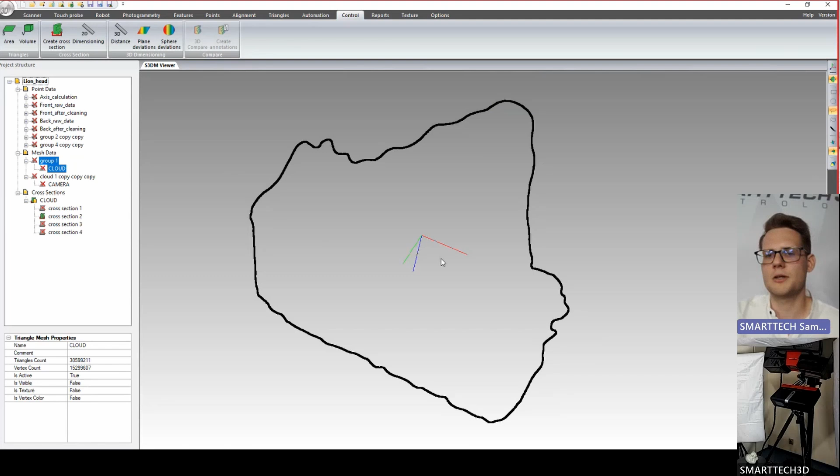And I think this is one of the most important things, that we want to use our devices for digitalization purposes, but you've got also the possibility to use our measuring software and measuring applications. So you will have all of that information in one software with our devices. And I think that will be the most important information.

Yeah, from my side, I think that it is clearly visible that the new technologies are allowing a lot of applications, giving us a lot of tools to help with the work, with the archaeological work.